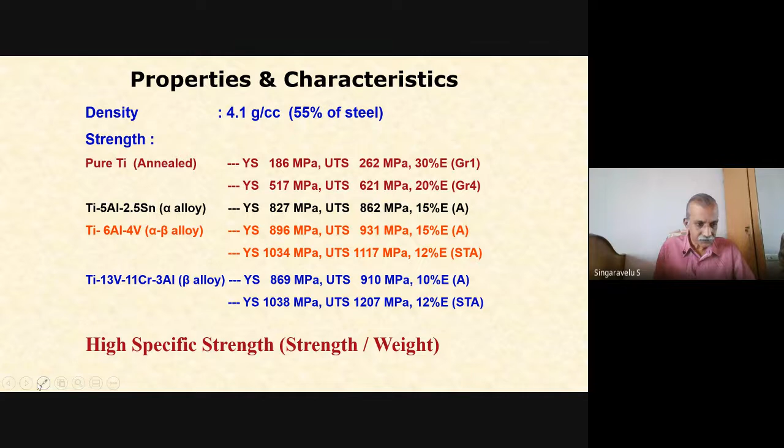So this I have already seen. Okay, corrosion resistance, especially in sea water, is good. Acid solution will have high oxidation resistance. It's having a good resistance to corrosion.

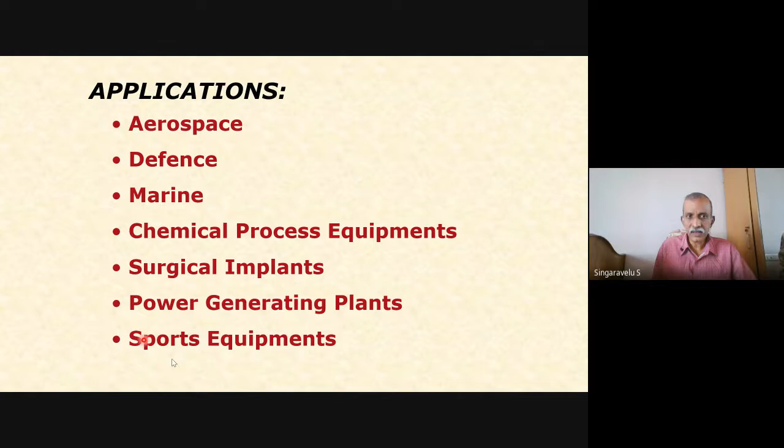Applications - critical applications like aerospace, defense, marine, chemical processing equipment, surgical implants, power generating plants, sports equipment. Light weight, corrosion resistance, good fatigue, high strength - all these call for critical applications in these areas. In aerospace, highly loaded components, airframe components, satellites - these are some areas, especially the fuel tank, engine casing.

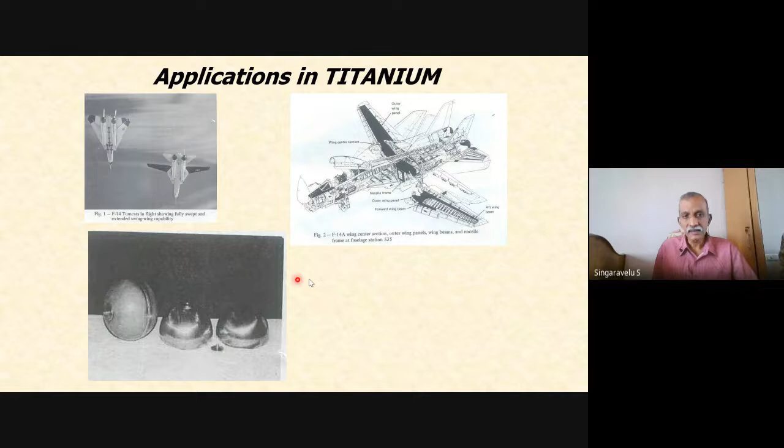These are made of titanium alloys. Chemical processing equipment, because of the high corrosion resistance - storage tank, anode basket in the electrolytic process. In all these areas titanium has been widely used. This is some of the applications where titanium has been used in aircraft industries and marine applications.

Coming to the alloy system - I told you it's commercially pure alloy, pure titanium, we call one category. Next is the alpha alloy, titanium alpha alloy. Another one is called beta alloy. So we have alpha, beta, and alpha-beta alloys in between.

In the alpha-beta form, or in the process, we are able to quench it and get the required high hardness - 1038, 1034, that range - by using this to retain the strength.

So which elements stabilize which phases? Aluminum stabilizes the alpha phase. Beta stabilizers include chromium, columbium, copper, iron, molybdenum, nickel, palladium, silicon, tantalum, tungsten, vanadium - all these stabilize the beta phase. If you add these, the beta phase gets widened.

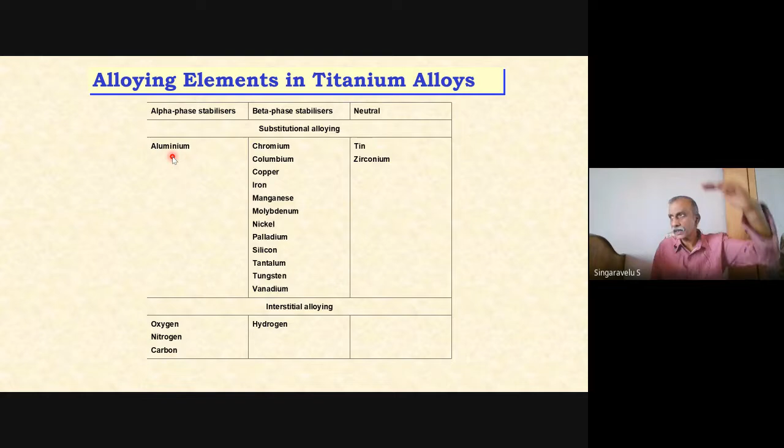Aluminum increases the alpha phase area, along with neutral tin and zirconium. There are certain interstitial elements: hydrogen, oxygen, nitrogen, carbon. These, within the space lattice at the atomic level, will go and sit between two titanium atoms.

So coming to the specification, ASTM has many grades. Aluminum, zirconium, moly - all these become the nominal composition of alloying elements. Look at these impurity levels - iron becomes an impurity here, oxygen is an impurity, carbon itself is an impurity here, at 0.1. Look at these strength levels.

It goes from 262 ultimate tensile strength, to 862, 924, 986. These are unalloyed, the top one. When we have alpha, near-alpha alloys, the strength goes up to 986, and yield becomes 938.

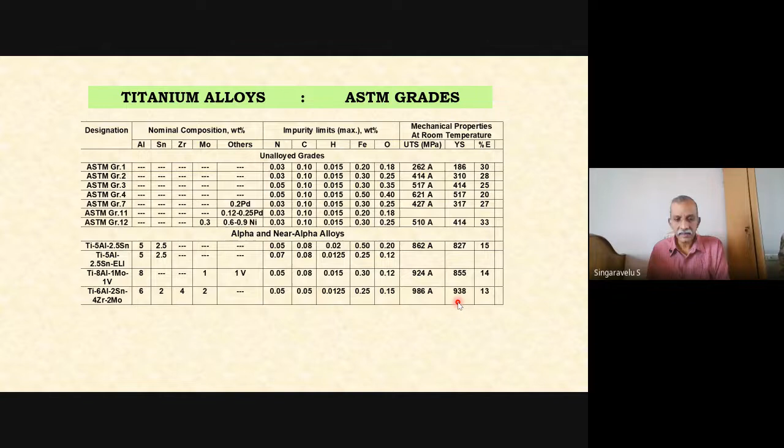So we have alpha-beta alloys, strength around 1117. Beta alloys are 1200, 1241, 1524. We have titanium with tin 4.5, zirconium 6, moly 11.5. This goes to the 1524 solution treated and aged condition. These are all the advantages.

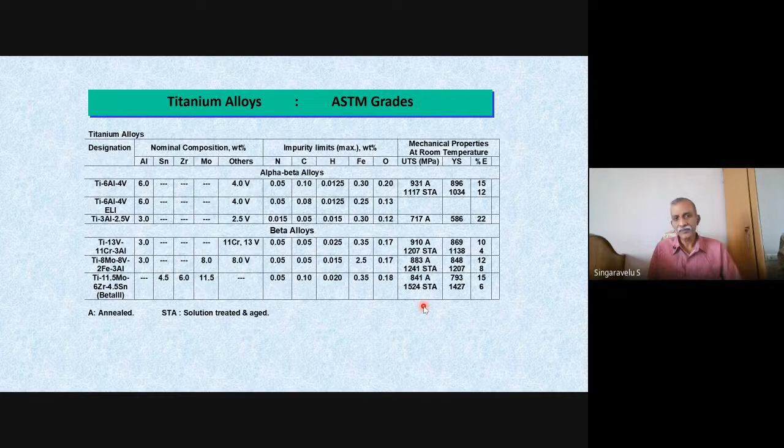Because of this solution treatment, we are able to get the required strength, taking it back to high temperatures where the allotropic form exists. Now if there's no allotropic form, it's the same alpha structure, so there's no use.

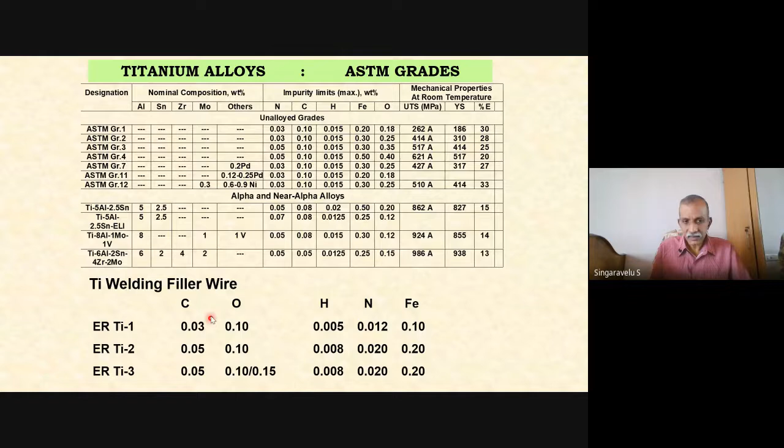Coming to the wire: ER Ti-1 TIG wire, filler wire, ER Ti-2, ER Ti-3. You have carbon 0.03, oxygen which must be well controlled, and these requirements are very important because this becomes an impurity level you have to control. The rest of the things match with respect to the alloy content.

These are various heat treatments, just for information. As I said, solution treated and aged: you take it to 900 to 970 for alpha beta alloys and quench it in water, hold for 1 hour then quench. Then the strength becomes high. If you do the aging after that, the specifications come out, with temperature at 480 to 510 for 12 hours - that is the aging treatment.

Similarly for beta alloys, the solutionizing treatment temperature is 760 to 850, and so on. Only for stress relieving, look at these temperatures: it's only 480 for pure titanium, in alpha beta alloys it's only 590, and alpha goes to 640 max. Within this range only, we have to heat it and do the stress relieving operation.

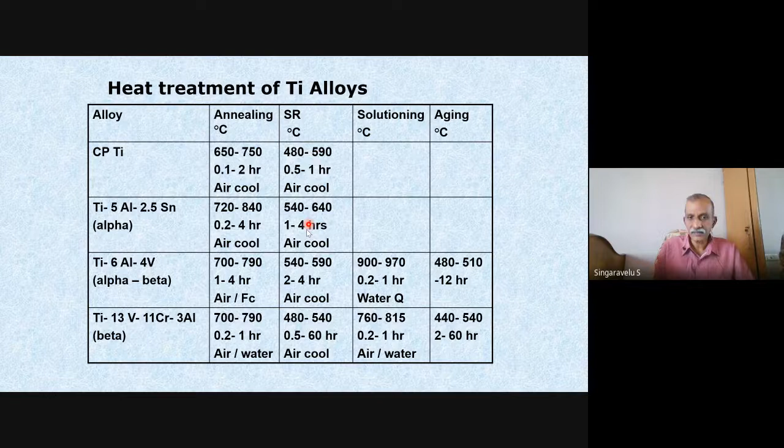Coming to the welding part: TIG welding, plasma arc welding, electron beam welding - all these processes are suitable with respect to the fusion welding route. Coming to solid state welding processes: diffusion bonding, superplastic forming followed by diffusion bonding, then friction welding, explosive bonding. These are all the techniques by which we can do the welding of titanium and its alloys.

On the basic requirement in fusion welding process, TIG is the best suited process, or electron beam welding by vacuum. Inert gas shielding is very much required - additional shielding for the solidified metal up to even 430, cooling to 350. Beyond 430 this metal starts reacting with oxidation. That's why once the weld is completed, the weld bead should be allowed to cool down to 350 with inert gas shielding. That is called secondary shielding, as people used to call it.

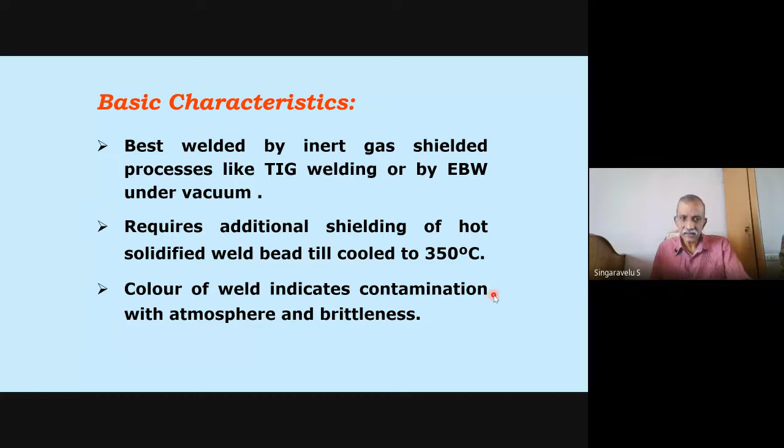The color of the weld indicates the contamination. Where it has reacted with oxidation and all can be very well seen with the naked eye with the color. This results in brittleness.

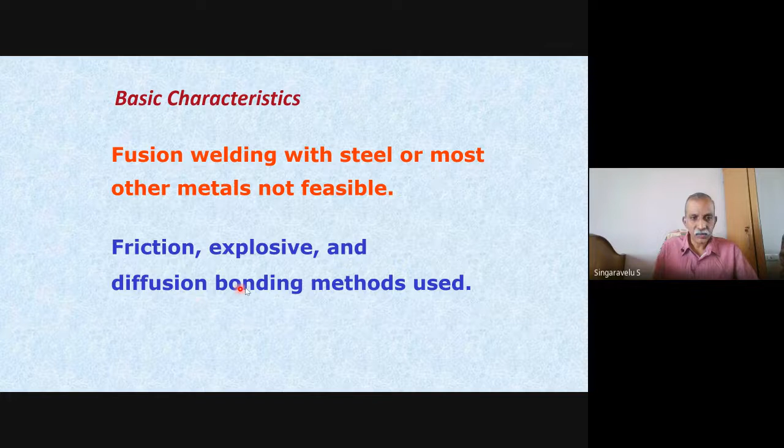Fusion welding with steel or other materials is not possible - that is one of the drawbacks. Friction welding, explosive bonding and diffusion bonding methods that we have discussed, we will see in detail.

That's the major advantage of using these materials for welding applications. So we'll discuss how we can do the TIG welding.

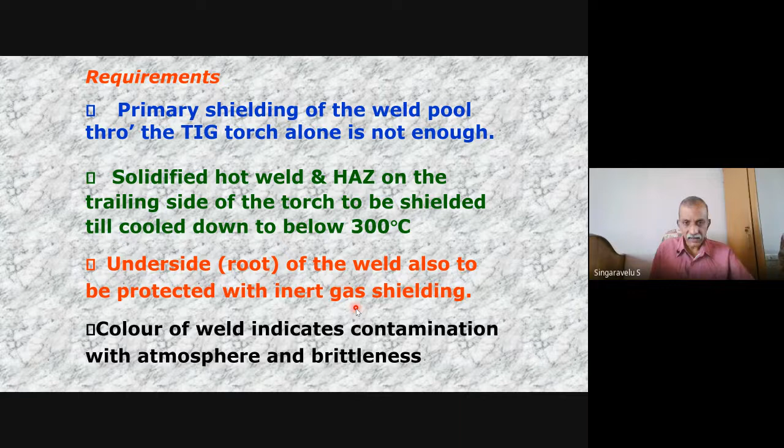Primary shielding - there are two shieldings: one is primary shielding, another is secondary shielding. Primary shielding through the TIG torch alone is not enough; you have to go for additional shielding, called secondary shielding. The solidified hot metal - the weld and the HAZ, not only the weld - has to be shielded by the trailing side of the torch. The weld which has already been completed has to be protected from the atmosphere till it cools down to 300 degrees centigrade. So we need the shielding, called secondary shielding. The root side also has to be shielded by inert gas. These types of shielding are mandatory in TIG welding.

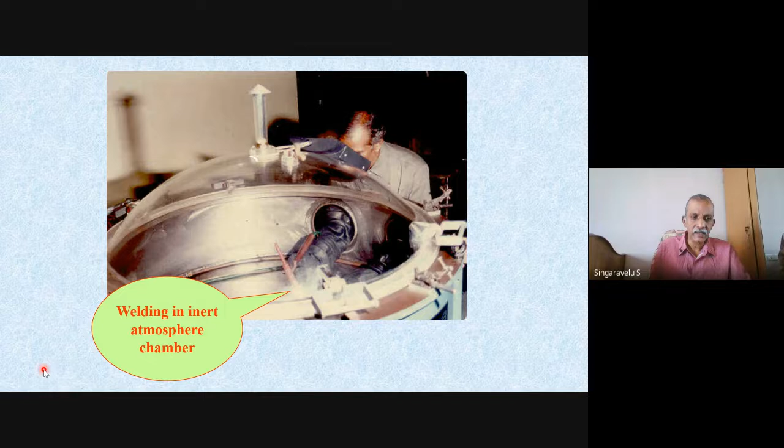So how can these be achieved? All this shielding can be achieved by doing the welding in an inert atmosphere chamber, a flow-purged chamber or a vacuum-purged chamber, or by welding in open air with auxiliary additional shielding. This is the inert atmosphere chamber, called glove box welding, where the air in the entire chamber has been removed and inert atmosphere like argon has been pumped in - like a glove for COVID testing - the welder has to put his hands inside, take the torch inside, and do the welding there. By this way, the root, additional shielding, and trailing shielding are all taken care of. This is another setup like that.

So wherein with the flow, these are all the inlet and outlet mechanisms by which the argon gas is supplied in. This is the component by which they are doing the TIG welding. This is the torch you can see. The welder has to manipulate the welding after seeing it, right?

So this entire chamber is filled with argon. Purging has been taken care of both for the trailing and the root arch, right? This is another chamber, completely vacuumized, a vacuum purged chamber. The component has been kept inside after the vacuum is built, and the welding has been done.

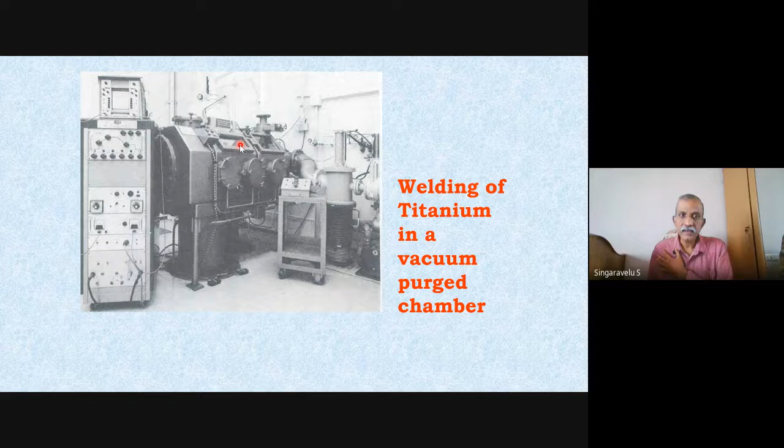Coming to shielding, in case of open air, primary shielding is through the torch, which has been taken care of. The secondary shielding is the trailing shield. As you know, already deposited weld metal has to be protected from the atmosphere, and that is taken care of by the trailing shield. This takes care of the solidified metal and the HAZ. Backside shielding is for the root pass protection, and that is for the grooved backing bar for root bead shielding.

The electrode is thoriated tungsten in the case of TIG welding. Normally the size will be bigger for the same current rating compared to ferrous material. Flow rate should always be higher, right? Use a gas lens for laminar flow. The flow should be laminar, not turbulent, so that the shielding becomes 100% effective.

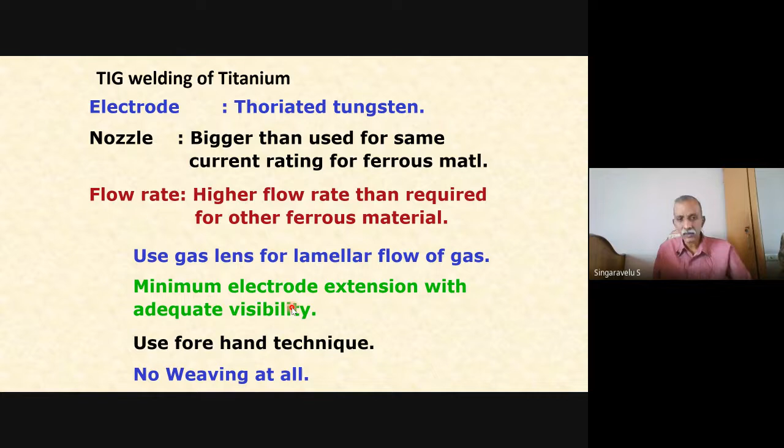Minimum electrode extension - normally the electrode tip will be protruding outside in TIG welding, so its length should be kept to the barest minimum, otherwise there is a chance of touching the titanium and getting contaminated. So minimum extension is required. Use the forehand technique, no weaving at all, right? This is open air welding with manual TIG.

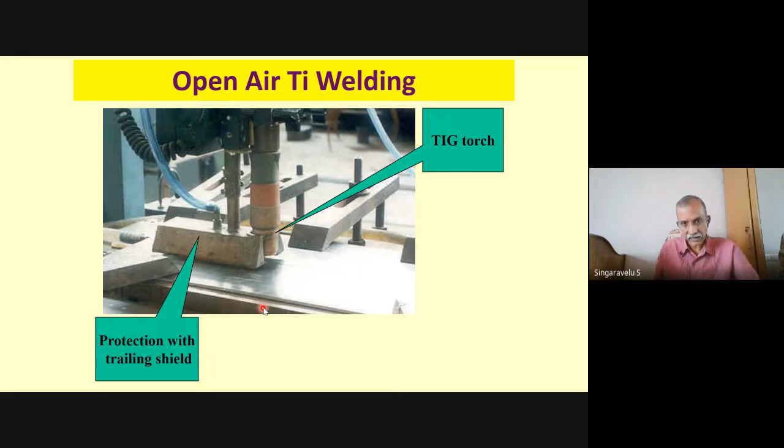This is the one - since it's a bead on plate welding, underneath there is no purging required. This is the shield. This is another one; it takes care of the pipe welding. This is the trailing shield, which takes care of the deposited weld metal and the HAZ. This is another way - this is the shielding arrangement setup.

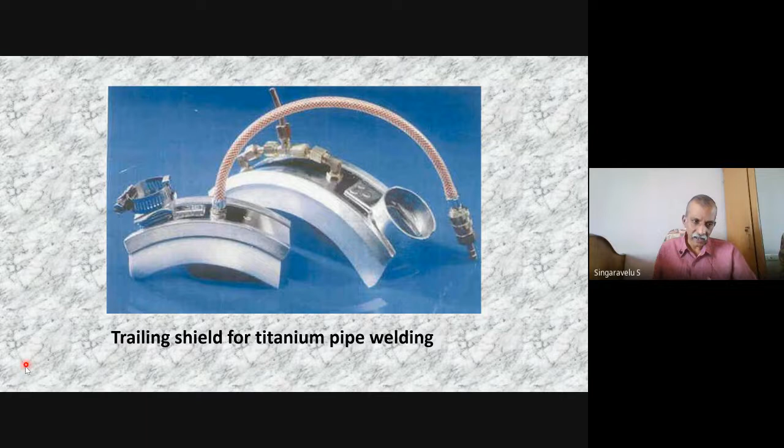Here it's made separately shown. Here we have an inlet which takes care of the curve, takes care of the common component geometry. Likewise you have to make the shield. The shield need not be like this alone - we have to take care of it based on the application and the geometry.

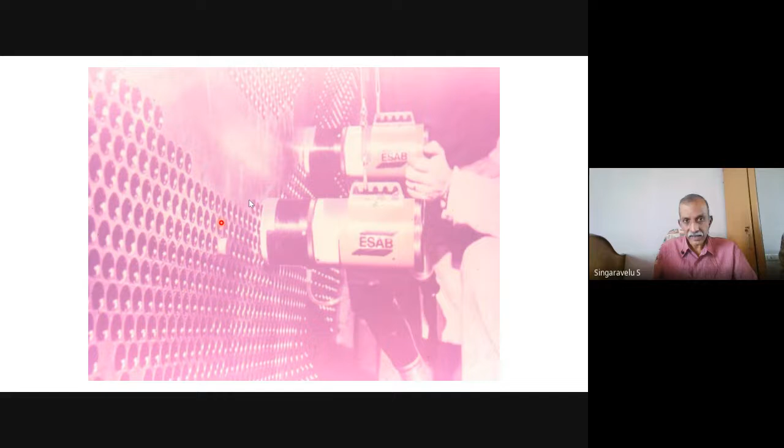This is the typical tube to tube sheet welding, right? Made up of titanium. Tubes are inserted here. They have been extensively used for nuclear steam generators.

So how to detect this contamination? I said there are some colors by which you can identify how this contamination happens - ineffective shielding, that is primary shielding, trailing shielding, contaminated shielding gas itself, the base metal and filler metal, right? These things have to be effectively avoided.

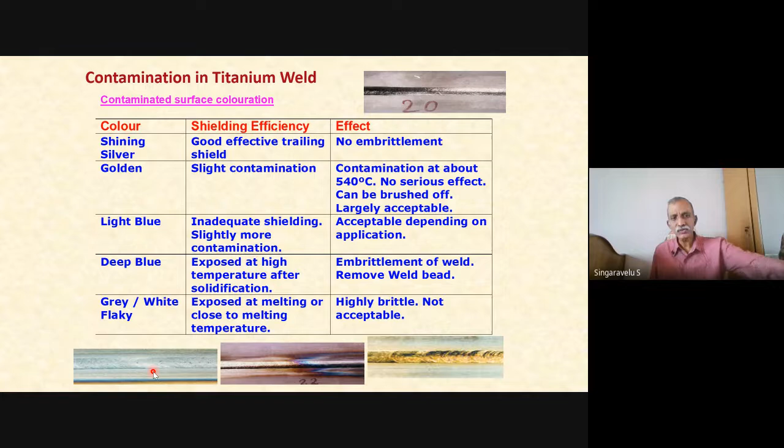Depending upon the application, we can decide with that. Deep blue - embrittlement of the weld, you have to remove it totally. Gray, white - highly brittle, you should not use these.

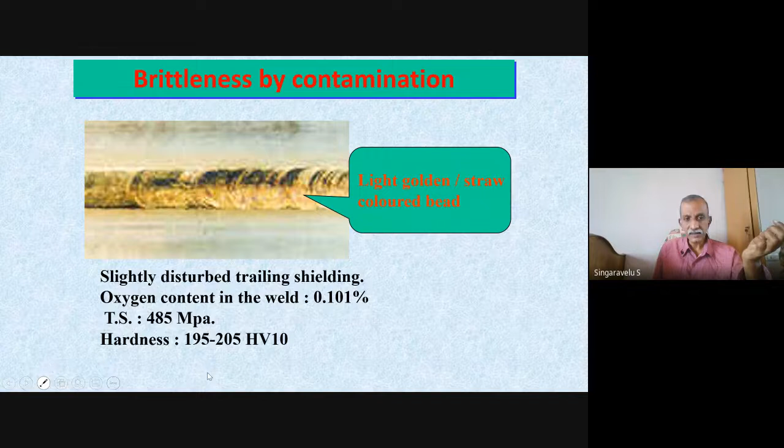So this is another one - white. Trailing shield is not sufficient. It has failed in the bend test because of this brittleness.

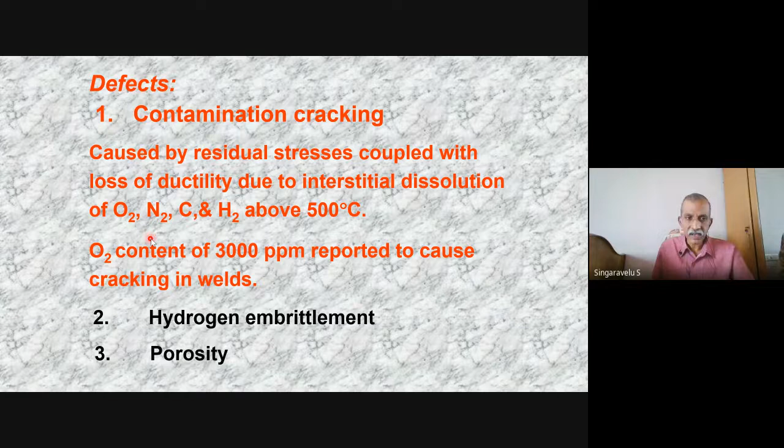Coming to the defect part, contamination cracking is caused by residual stress coupled with a lack of ductility. The interstitial elements, some of which go into solution in between the titanium atoms - like oxygen, nitrogen, carbon, hydrogen. Oxygen plays a very important role; its content, almost about 3000 ppm, causes cracking in the weld. Hydrogen embrittlement and resultant porosity also occur.

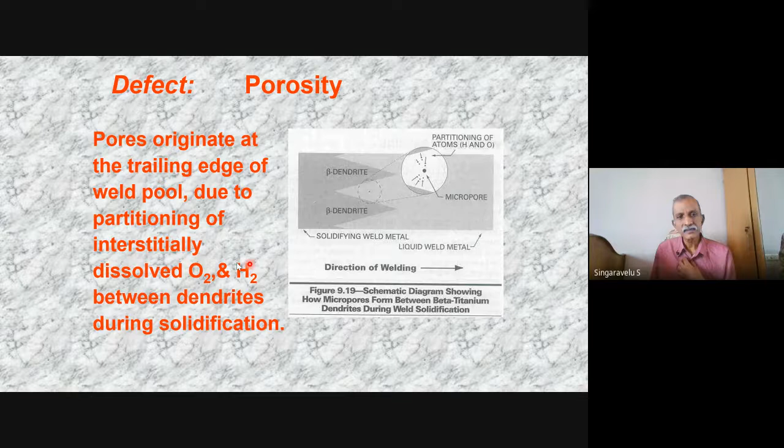What's the remedy then? Cleanliness, cleanliness, cleanliness is the only solution. The joint surface has to be cleaned with a stainless steel wire brush. Don't use this wire brush for other applications. An exclusively separate wire brush has to be kept, made of stainless steel. It is very much important.

Aluminum oxide or silicon carbide grinding wheel should be used. Degrease with acetone, including the filler rod and the areas, to remove all hydrocarbons. Adequate inert gas shielding is needed till up to 300 degrees centigrade of the deposited weld metal. Most important thing, shielding gas should be restricted with oxygen and moisture content.

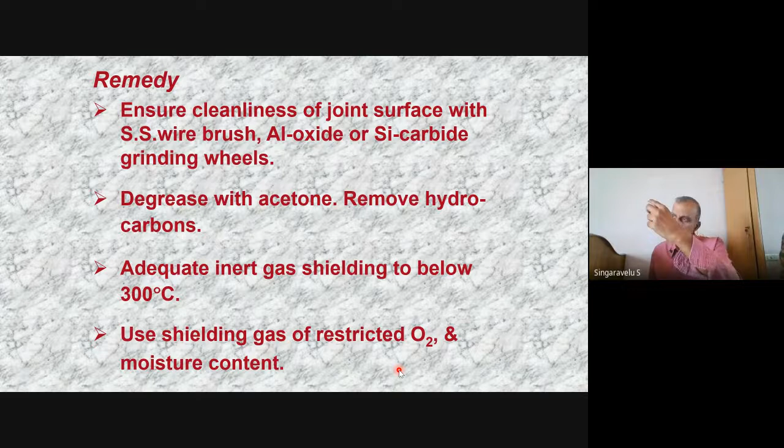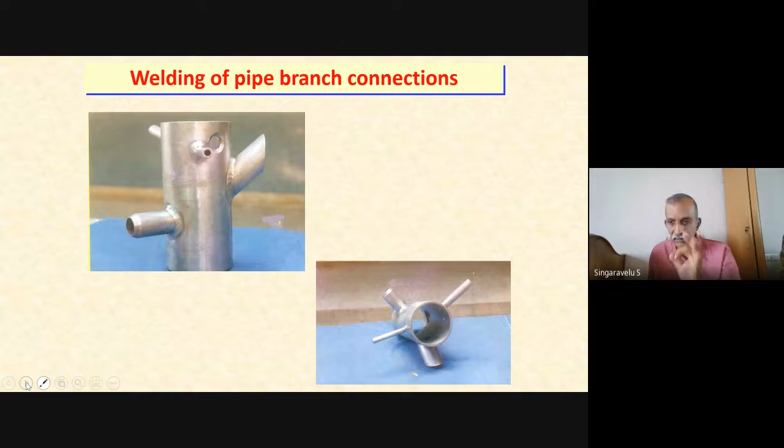That is very much important. You should not touch the wire with bare hands. It is important. This is some of the component - I think you can skip that.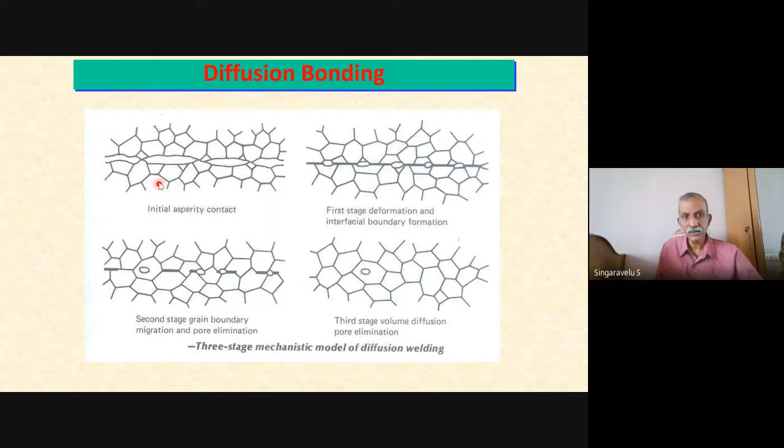This is the mechanism. Initially we have some contact like that. The first stage is deformation and interfacial boundary formation. In the second stage, there will be migration and the entire pores are getting eliminated. In the final stage, the entire volume of pores is eliminated, and you have proper bonding between the two.

Skip that structure. Temperature is almost 0.6 to 0.8 times the melting point - this is what has to be done. For alpha beta titanium alloys, it is 75 to 100 degrees Fahrenheit above beta transus. Transus is nothing but the critical temperature - like in the iron carbon diagram you have seen lower critical temperature, upper critical temperature, and so on.

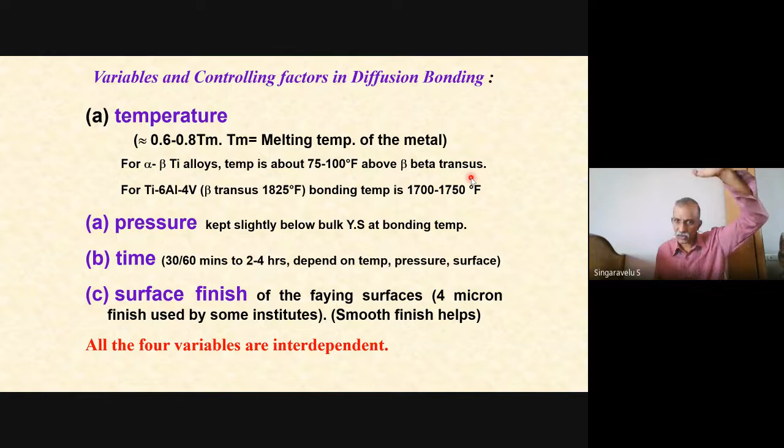Here there is only one transition, alpha to beta. The temperature is called the beta transus, and it is always 75 degrees Fahrenheit above the beta transus temperature. For titanium aluminum, it is 1825 degrees Fahrenheit. Pressure should be just below the yield point, and time is also a parameter.

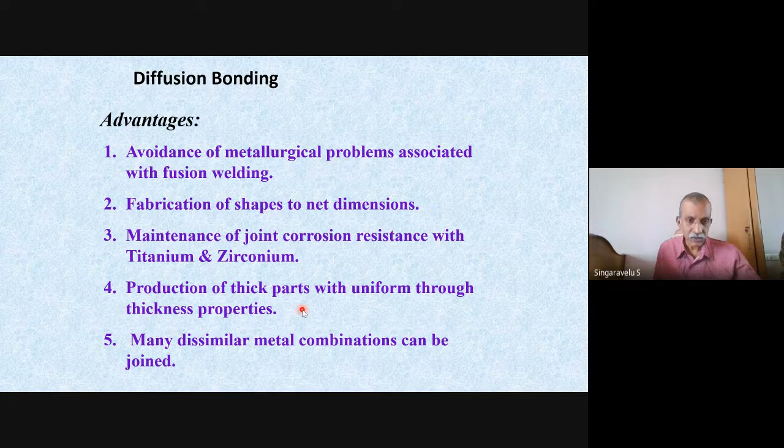These parameters have to be followed for this particular process. The advantage is avoidance of metallurgical problems, fabrication of different shapes to net dimensions - what dimensions you can maintain. Corrosion resistance is very well maintained, since titanium applications call for corrosion resistance. Production of thick parts with uniform through-thickness properties is a major advantage, and dissimilar combinations can be done with this welding.

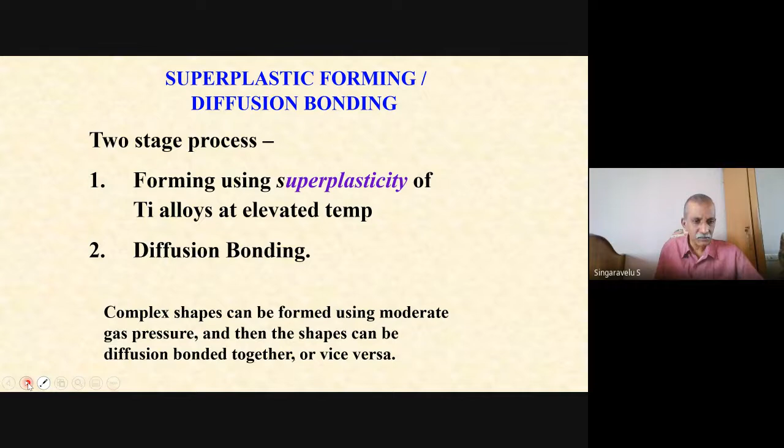This is one of the latest techniques called superplastic forming coupled with diffusion bonding in titanium. It's a two-stage process. Forming usually uses superplasticity of the titanium alloys at elevated temperature, then diffusion bonding takes place. Complex shapes can be obtained by this process.

The definition: superplasticity is a phenomenon by which materials are able to achieve extraordinary elongation without undergoing necking, that is without breaking. Titanium can be elongated to 1000% at temperatures of 926 to 954 degrees centigrade. That is the advantage, that's why we go for superplastic forming.

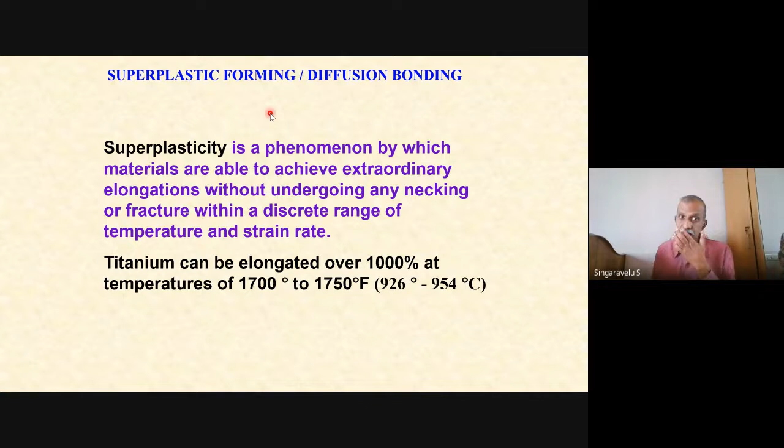After superplastic forming coupled with diffusion bonding, this is the single sheet which has been formed. These shapes have been taken care of with a single sheet. Let us see how it has been done. So we have a single sheet, two sheets, three sheets - titanium aluminum vanadium sheet.

Put these together, the reinforced structure in the single sheet has been formed by superplastic forming. With two sheets, this is the die, you have the top pieces and another one - this is how it has been formed. The top has been joined like this. In this area, this has been formed and the welding has been done.

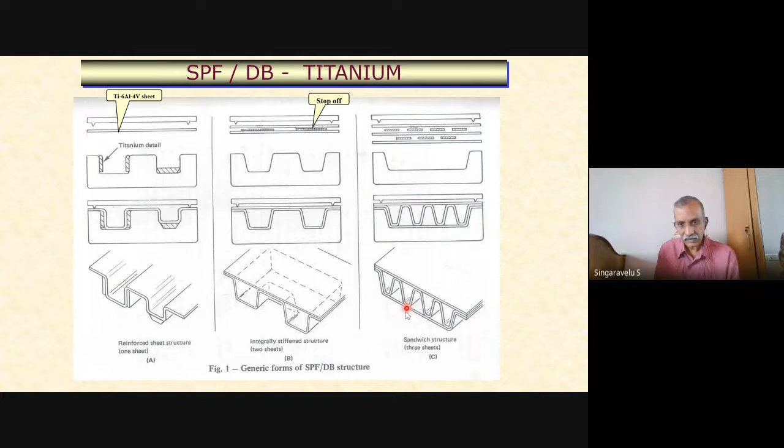This is the sandwich structure with three sheets. Bottom like a pan shape, in between you have like this, on the top you have - so all these three, plate 1, plate 2, plate 3, and in between, superplastic forming coupled with welding is done here, here, here, here by diffusion bonding. This is the major advantage by which titanium components are being manufactured.

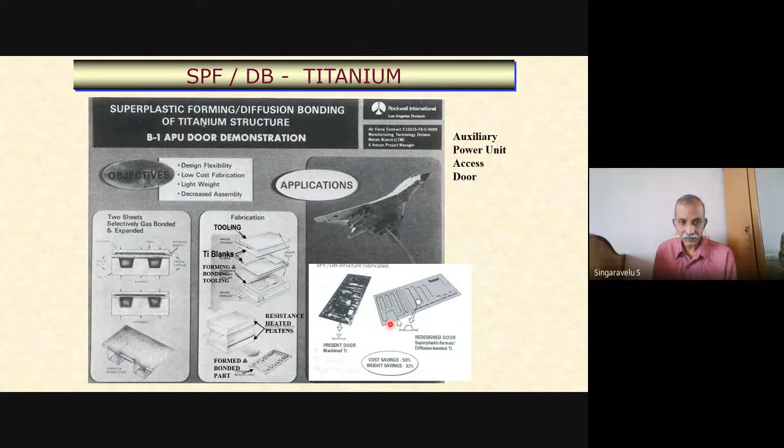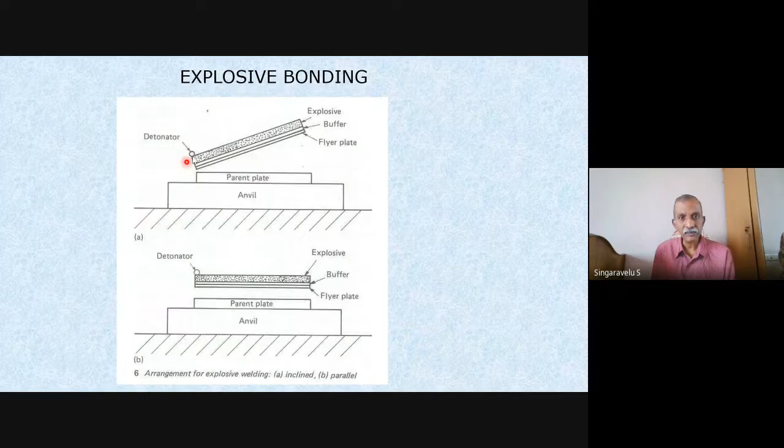Another one is explosive welding. We have studied that - we have the anvil, the parent material, and another flyer plate, and above that we have the explosive and a detonator. Once the detonator gives fire, the explosives give the required energy, and the parent plate and the flyer plate get welded together.

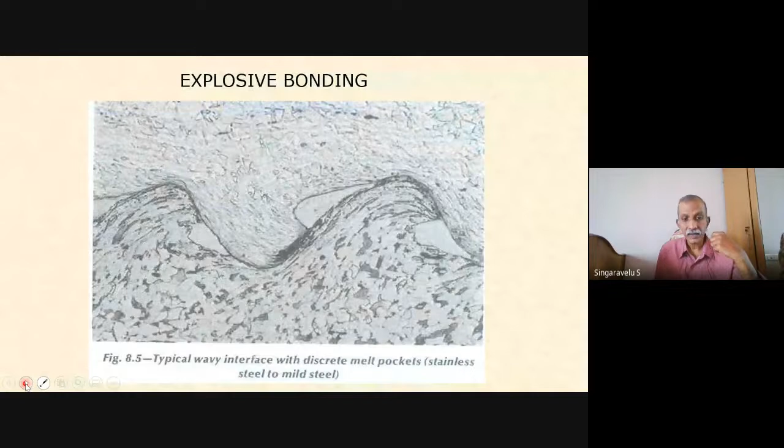This is how the structure will be at the interface - this is called explosive bonding. Titanium can be joined with explosive welding by this method. So this is a titanium clad sheet done by the explosive cladding method. It is steel - this is the titanium clad plate, showing how it has been joined.

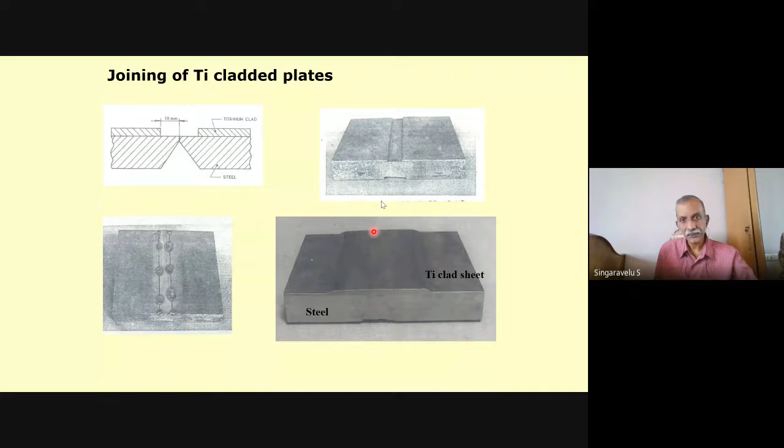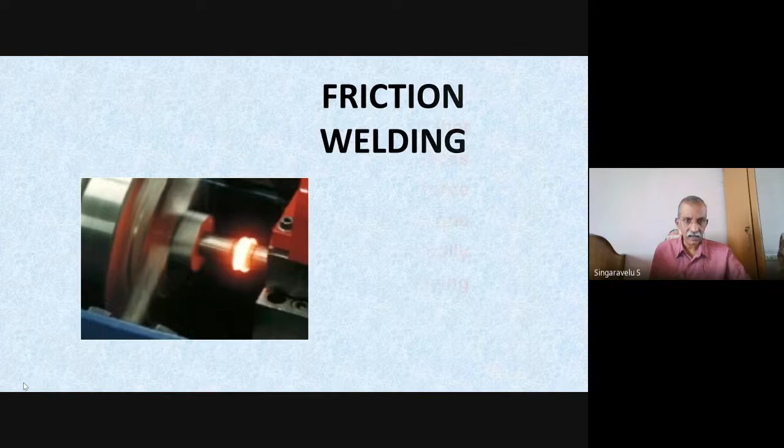Explosive welding is another method, it's very good for titanium welding. Coming to the friction welding part, all of you would have seen what friction welding is. It's a solid state process, please understand.

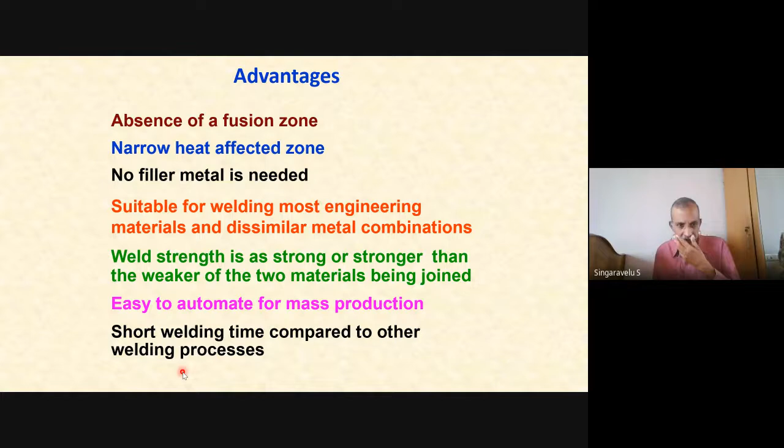In the beginning, the two members are there. We rotate it and the flash starts forming, and once the flash develops, we apply force and forging takes place. It is near the melting temperature in the solid state, and we are able to join both components. Fusion zone is absent, the HAZ is very narrow, no need for filler - these are some advantages. Most importantly, it is easy to automate for mass production.

Titanium can be welded with friction. This is some of these components - stainless steel to titanium has been done with friction welding. This is titanium to titanium, it has been welded by friction welding. This is another advantage by which we can form titanium components.

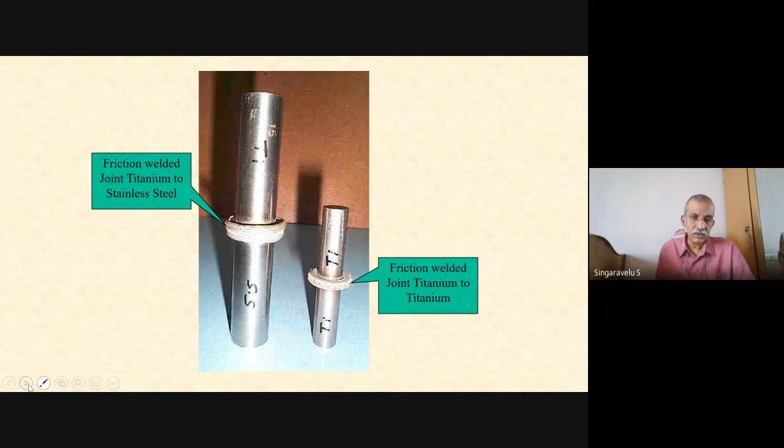In a nutshell, titanium is allotropic. Shielding becomes very important - primary, secondary, and root shielding. Strength is very high, with good corrosion resistance. The process is TIG, and it can also be done with other processes like solid state friction welding, explosive welding, and superplastic diffusion bonding. Colors indicate whether the weld has been contaminated and so on.

Coming to the copper welding part.

It's a highly ductile material. Melting point is very low, but the fun part is thermal and electrical conductivity is very high, excellent electrical conductivity. Similar to titanium, the corrosion resistance in certain environments, especially seawater corrosion, is good.

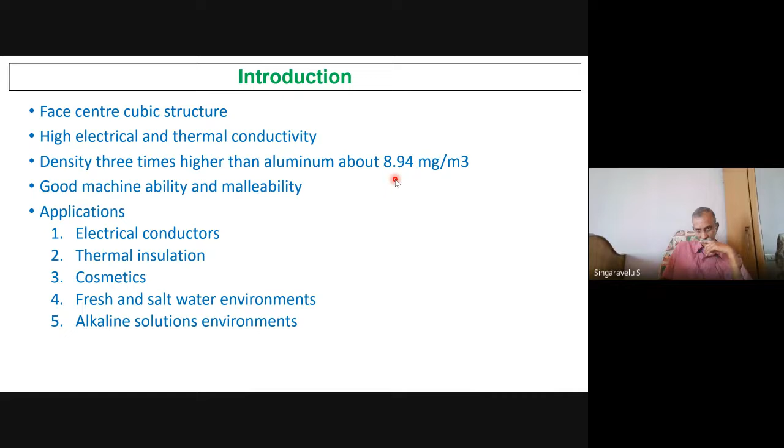You can easily fabricate it, good strength and fatigue resistance. It is a face centered cubic structure at room temperature. Density is 3 times higher than aluminium, about 8.9. Malleability is good, machinability is good.

Applications: electrical conductors, thermal insulation, cosmetics, saltwater environment, alkaline solution environment, because it has good corrosion resistance and good electrical conductivity. Those areas this has been widely used.

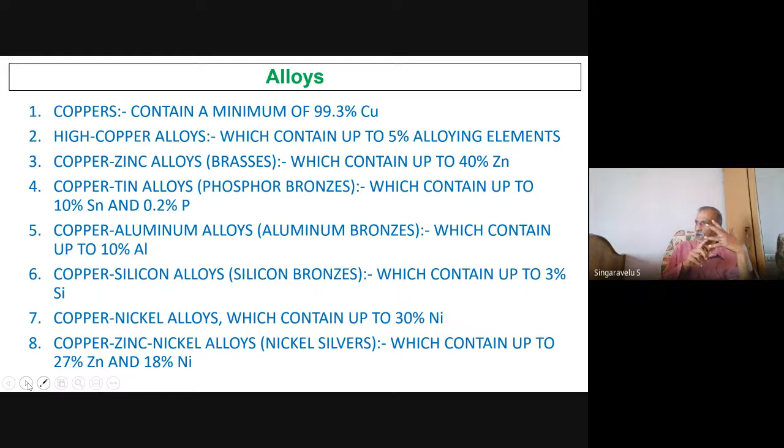Coming to the alloy system, titanium we have only three: pure titanium, or alpha, beta, like that, and rather the strength has been increased due to solution treating. Here, these alloy systems have been devised in such a way that we have pure copper, almost 99.3% copper. Another one is high copper, where we can add up to 5% of alloying element.

Another one is called the very famous alloy, copper zinc alloy. We call it brass. You've heard about it. Brass is copper zinc alloy. 40% zinc is added, called copper zinc.

Another one is called copper tin alloy. This is called phosphorus bronze, because tin becomes the primary element. It contains up to 10% tin and up to 0.2% phosphorus. It's called phosphor bronze. We have pure copper, we have brass, and we have phosphor bronze.

And we have copper aluminium, called aluminium bronze, with 10% aluminium. Third one is called silicon bronze, which contains 3% silicon.

And we have copper nickel alloys, kind of up to 30% nickel. And we have copper zinc nickel alloys, which we call nickel silver. It contains 27% zinc and 18% nickel.

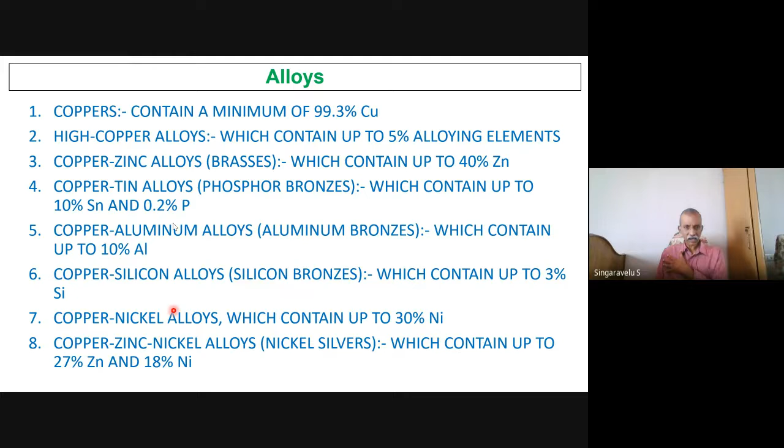You need not memorize all those things, but you can identify copper as pure copper. We have alloyed copper. We have bronze, phosphorus bronze, aluminium bronze, silicon bronze. And we have copper nickel and nickel silver. These are some of the alloy systems by which copper has been identified.

The questions have been asked: name of the alloys, the type of brasses, or the aluminum alloys, you can identify. And the alloys in the cast structure.

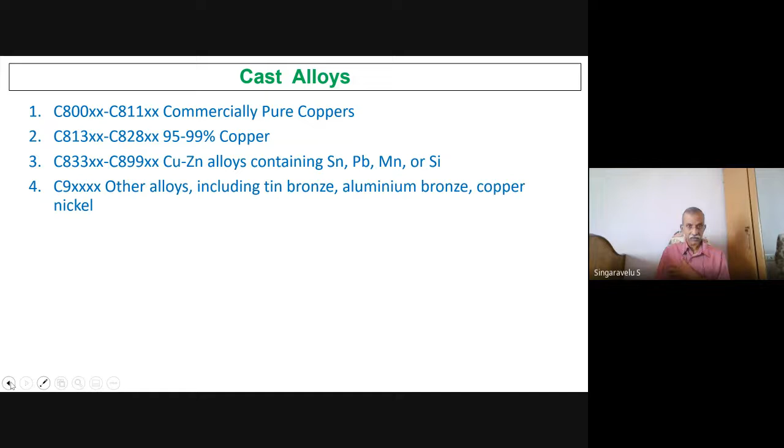This 8000 series is called pure copper. 813 to 828 series is called 95 to 99% copper. 833 to 899 is copper zinc alloys. And 9000 series is called other alloys, in the cast form. This is in the rod form, tube, sheet, and so on.

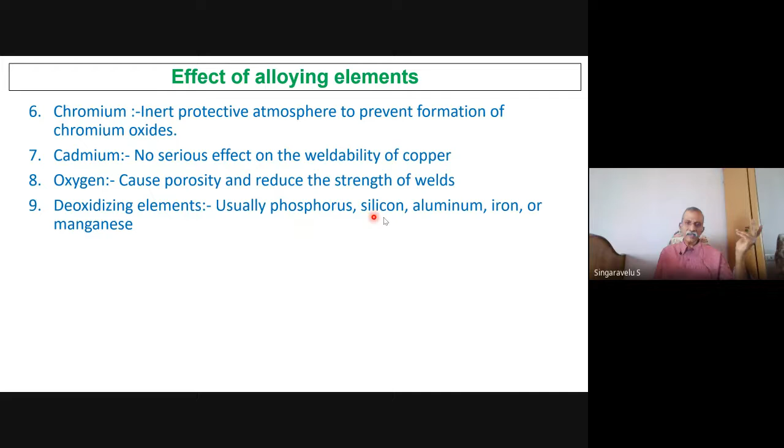Chromium needs an inert protective atmosphere to prevent formation of chromium oxide. Cadmium has no serious effect. Oxygen causes porosity, reduces strength. Some deoxidizing elements, usually phosphorus, silicon, aluminum, iron, have been added. This is something with respect to the alloying elements' effect.

Coming to the weldability part, what are these factors which get affected? Effects of thermal conductivity: copper has a high thermal conductivity. The type of current and shielding gas must be selected to provide maximum heat input because heat is immediately dissipated. Preheating is decided based upon the base material thickness.

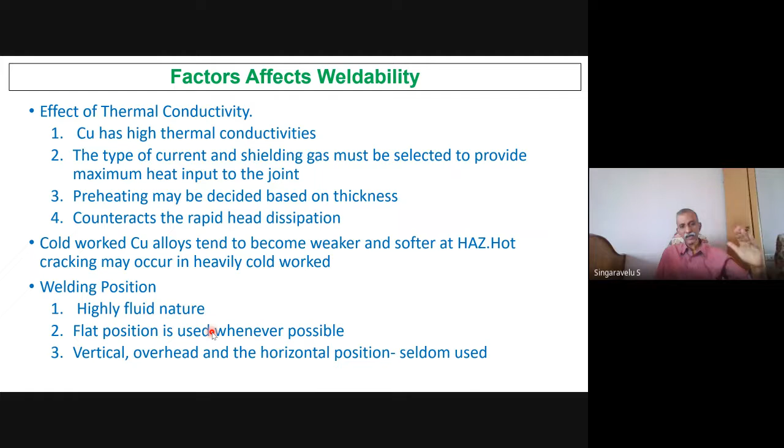This thermal conductivity counteracts the rapid heat dissipation. Cold worked copper tends to become weaker and softer at the HAZ. Hot cracking may occur during welding. Regarding welding position, due to the highly fluid nature, flat position should be used wherever possible. Vertical and overhead positions are rarely used.

Precipitation hardened alloys have beryllium, chromium, boron, nickel, silicon added to them. That should be taken care of during oxidation.

There is a reduction in mechanical properties due to over-aging. In precipitation hardening and aging alloys, certain elements are added which come as precipitates that enhance the strength. If overaging occurs, that is, if it's kept at higher temperatures during the welding process for some more time during cooling, this may reduce the mechanical properties. It should be welded in the annealed condition, followed by the precipitation treatment. This is the solution.

Alloys will deteriorate their own mechanical properties because of this aging. After aging, these precipitates will never come back to their original state, so it will not form the precipitates again. The precipitate gets broken down, which is called overaging. So the better process is to do it in the annealed condition, followed by the precipitation treatment.

Hot cracking is another problem associated with copper, copper-tin alloy, and copper-nickel, because there is a wide difference between the solidus and liquidus temperatures. If you look at the iron-carbon diagram or similar alloy systems, the difference is very high. Severe shrinkage stresses are produced, and interdendritic liquid metal gets entrapped between thin films, which causes hot cracking. Porosity: zinc and cadmium have low boiling points, which leads to porosity. Vaporization of these elements also results in porosity.

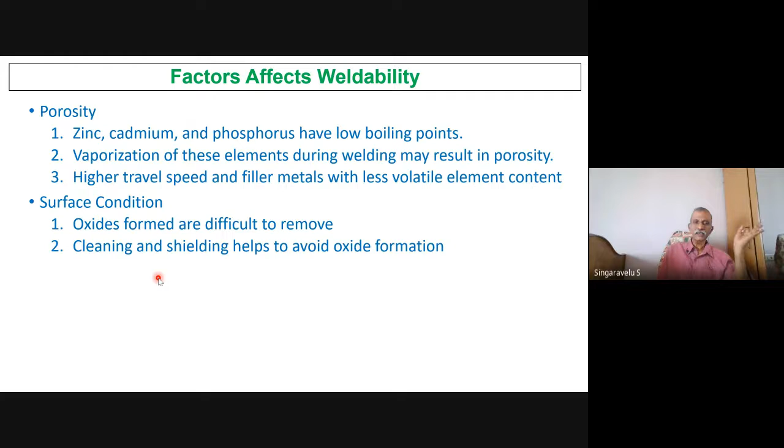Zinc vapor, high travel speed, and filler metals with less volatile element content are the required solution. As for surface conditions, oxides formed are very difficult to remove. Cleaning and shielding helps to avoid oxide formation.

Coming to the real weldability characteristics of these alloys, from pure copper to various brasses and bronzes: pure copper has high conductivity and requires preheating above 5 mm thickness. There's porosity and embrittlement in the HAZ in tough pitch copper, and porosity in the heat affected zone in phosphorus deoxidized copper. You have to preheat beyond 5 mm.

In the brasses, zinc vaporization occurs. Brass is an alloy of copper and zinc, and zinc vaporization gives porosity and toxic fumes. Low zinc brass, up to 20%, is weldable by fusion, and caution requires selecting zinc-free filler metal. Normally, brazing is preferred for these brasses. Higher zinc content is very difficult to weld by fusion, so brazing is the best method.

Tin and phosphorus bronzes: very high hot cracking occurs, prone to hot cracking because these form low melting bonds. Aluminium bronze forms aluminium oxide. To prevent that, go for gas shielded processes like TIG with AC, or MIG. It has low thermal conductivity, so no need to preheat for aluminum bronze.

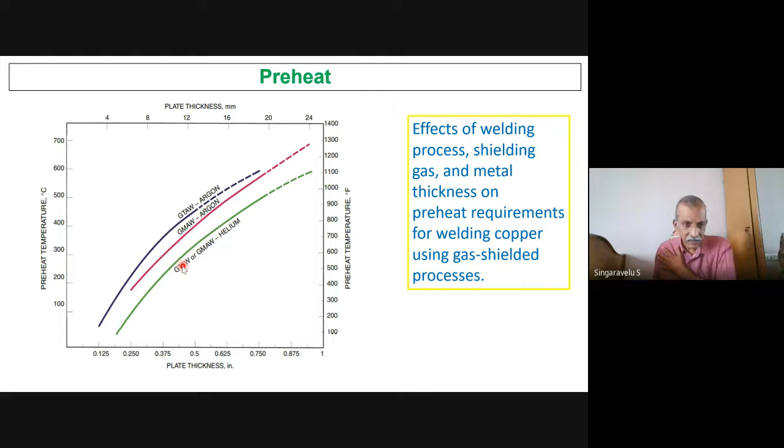I'm not going to go in detail with that. There will be a reduction in preheating temperature. This is unique for this copper welding.

Coming to the effect of shielding gas with respect to preheat on the bead or penetration effect, with helium you can see penetration of almost 6 mm, nearly 5 mm. In the case of argon, if you preheat to 400 degrees, then only we can achieve the same 4.6 mm penetration. That's why the effect is more with helium, or with argon you have to go with almost 400 degrees to achieve the same penetration. If you reduce the preheat temperature with argon, the penetration comes down, because it immediately dissipates the heat.

Coming to the process side, SMAW is normally used for maintenance surfacing of worn-out parts. Electrodes available are ECuSi, ECuSn-A and so on. Use DCEP, as I said earlier, for flat position welding.

In the case of TIG, argon or argon-helium mixtures are used with increased heat input, AC used for aluminum bronze and copper beryllium alloys up to 3.2 mm. Pulsed current can also be used in TIG welding.

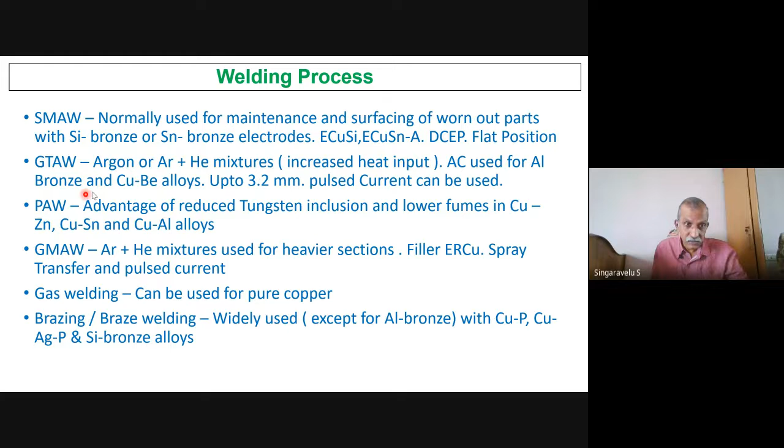Plasma arc welding can be done, with the advantage of reduced tungsten inclusion and lower fumes. Why? The tungsten rod is kept inside the cup, the nozzle, it is not protruding outside. In TIG it protrudes outside, but in plasma arc welding it is kept well inside, recessed. No inclusion, very good process.

GMAW can be done, argon plus helium mixes for heavier sections. Filler is ERCU, spray transfer, pulse current can be used. Gas welding is used for pure copper, no problem.

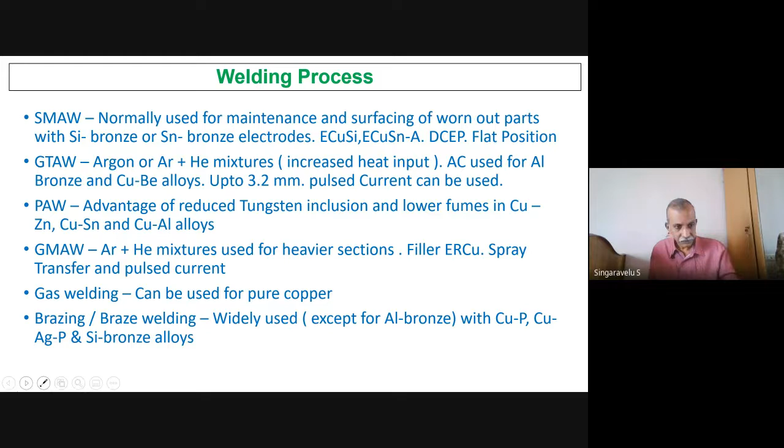Leaded bronzes are unweldable. Use helium shielding for alloys with higher thermal conductivity. Filler should not have zinc; the recommended filler is ERCU-SN-A. Do the same for brass, you can do it with GMAW, filler should not contain zinc. Silicon bronze uses ERCU-SIA filler, which has good fluidity because of the addition of silicon.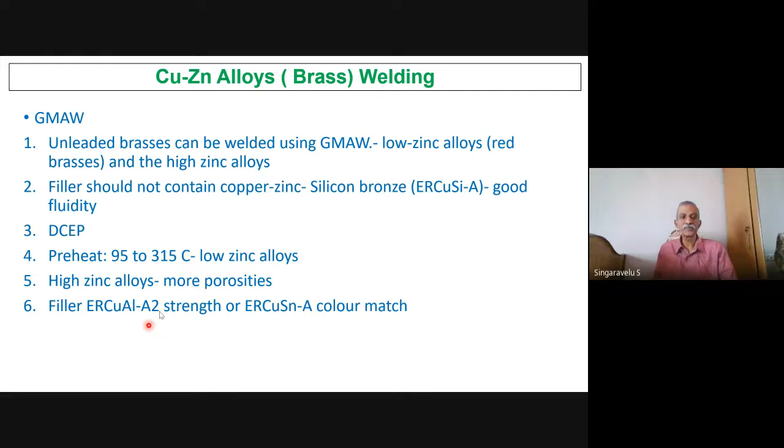Polarity is DCEP, but for GMAW you have to preheat to 95 to 315 degrees for low zinc alloy. High zinc alloy has more porosity and is not recommended.

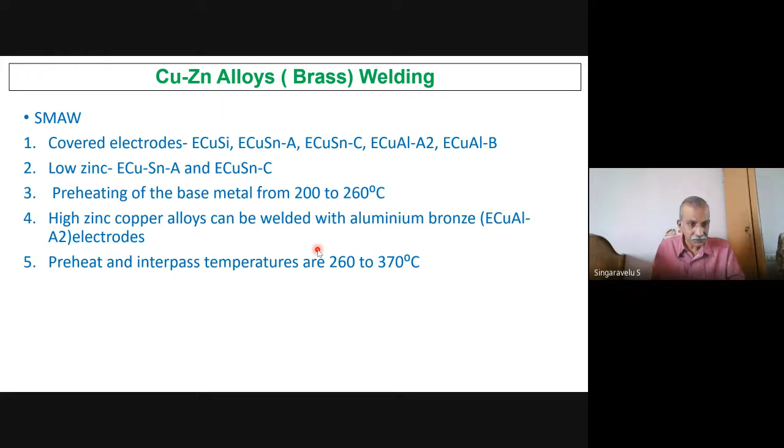SMAW electrodes are also available in different grades, low zinc is available, preheating 200 to 260 is very important. High zinc copper alloys can be welded with aluminum bronze electrodes, ECuAl-A2, for high zinc. Preheat and interpass control has to be done very carefully, 260 to 370 for zinc copper. These are some techniques to follow during SMAW.

Coming to phosphor bronze, in the case of TIG, up to 13 mm you can do DCEN or stabilized alternating current. Each layer has to be shot peened, very important. Shielding gas is argon, for thicker sections go for helium, then only you can achieve the penetration shown.

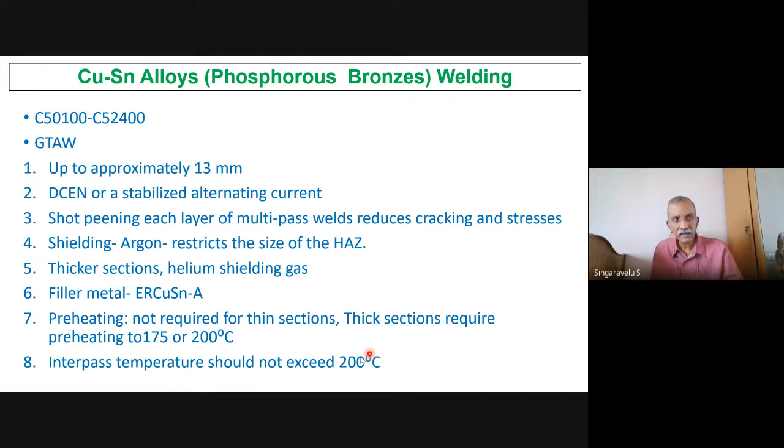Filler is ERCUSN-A. Preheating is not required for thin sections. Thick sections call for 175 to 200 degrees centigrade. Caution: 200 degrees is the limit. Do preheating, do welding, stop, do welding like that - this is the technique.

In the case of GMAW for phosphor bronze, up to 13 mm, single V filler is recommended. Preheating of phosphor bronze helps obtain complete fusion with less porosity, but columnar grains increase and it leads to hot cracking.

Precautions must be taken - preheating and interpass temperature have to be critically controlled. 190 degrees centigrade is very critical, 170 is the preheat and 190 is the upper limit. SMAW covered electrodes are available, preheating is 150 to 200. For obtaining maximum ductility, this can be post-weld heat treated to 480 degrees centigrade.

GTAW copper nickel alloys up to 1.6mm can be welded using thoriated electrode with argon shielding gas. DCEN or alternating current can be used for automatic welding. Preheating is not required.

Backing strips or rings can be used to support the root pass. Filler metal should be deoxidized to eliminate porosity and the possibility of oxygen embrittlement. The wire has to be ERCuNi, completely deoxidized, sometimes referred to as double deoxidation. An autogenous weld can be made up to 1.6mm thickness.

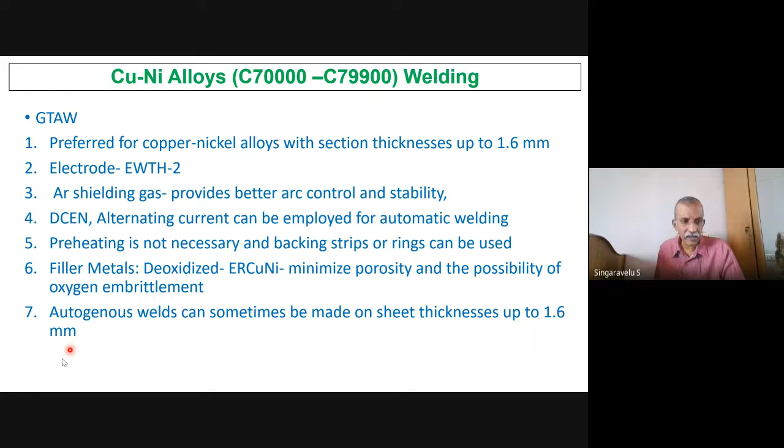For the same copper nickel alloy, GMAW is a very good process, preferred for non-ferrous copper alloys up to 1.6mm thickness, only in flat position. The shielding gas is argon; argon-helium mixes give better penetration for thick sections. Direct electrode positive is recommended, and spray transfer filler metals are available. No preheating or post heating is needed.

Interpass temperature should be maintained below 65, which is very critical. SMAW is also available; DCEP has to be used, but slag removal is a little difficult. You must ensure the slag is completely removed before depositing the next pass. This process is recommended when going for vertical and overhead positions, for certain applications.

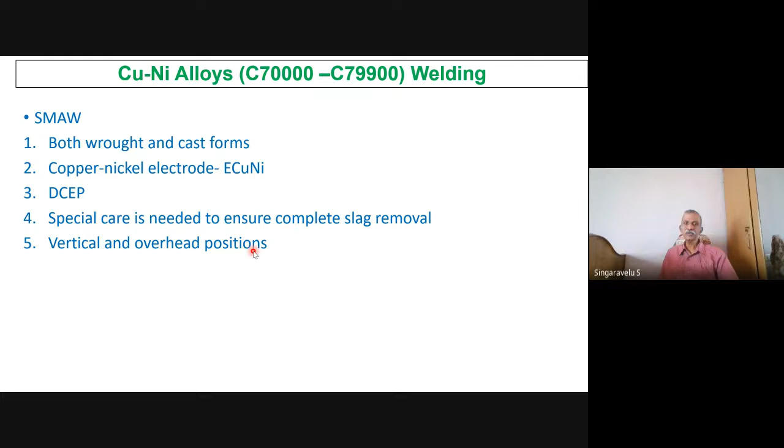Other welding processes besides TIG, MIG, plasma and manual welding include electron beam welding and laser beam welding. Difficulties include high reflection of the laser beam and higher thermal conductivity. Absorption increases with temperature, so a shorter wavelength is required.

Electron beam welding can be done for both thin and thick sections. Resistance spot welding can also be used; lower conductivity alloys can be easily spot welded, but it's not practical for unalloyed copper.

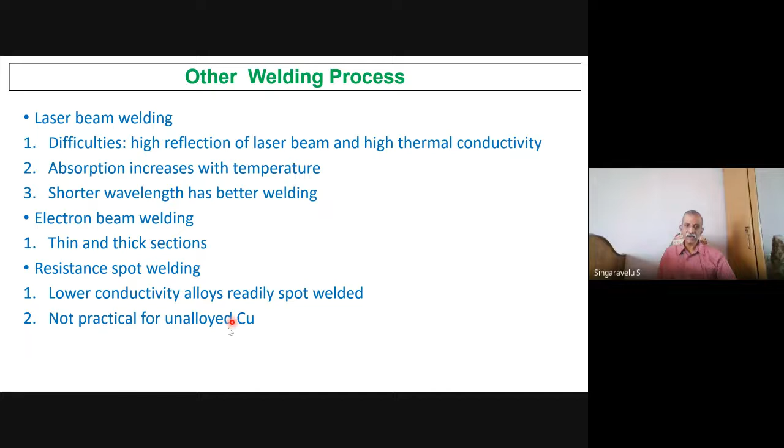Flash welding can also be done. Leaded copper, up to 1% lead, can be flash butt welded with rapid upsetting at minimum pressure. Yesterday we discussed high strength low alloy steel where pressure has to be increased; here you have to go for minimum pressure, due to no defined melting point and a narrow plastic range.

Premature termination of the current results in lack of fusion, while delayed termination causes overheating. Parameter setting is very critical. In solid state welding, annealed copper can be welded at room temperature due to good malleability. Diffusion welding or explosive welding is also possible. These are some of these processes.

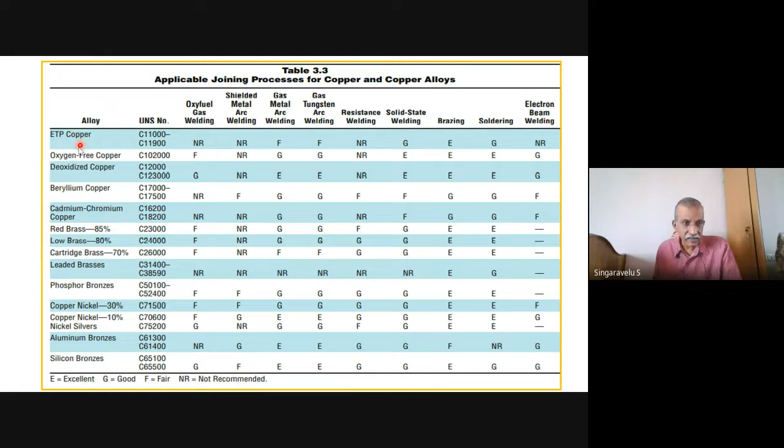This gives a rating for the processes against materials such as ETP copper, oxygen-free copper along with UNS numbers, brass, cadmium copper, lead brass, phosphorus bronze, and so on. Against these, many processes are discussed including shielded metal arc welding.

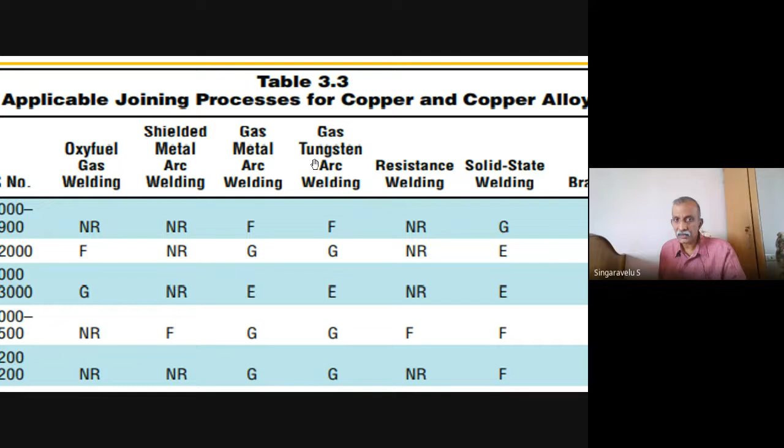This one I have not discussed: gas metal arc welding, gas tungsten arc welding, resistance welding, solid state welding, brazing, soldering, electron beam welding, and so on. For each material, a table is given which provides useful information on whether a process is fair, good, recommended, or not.

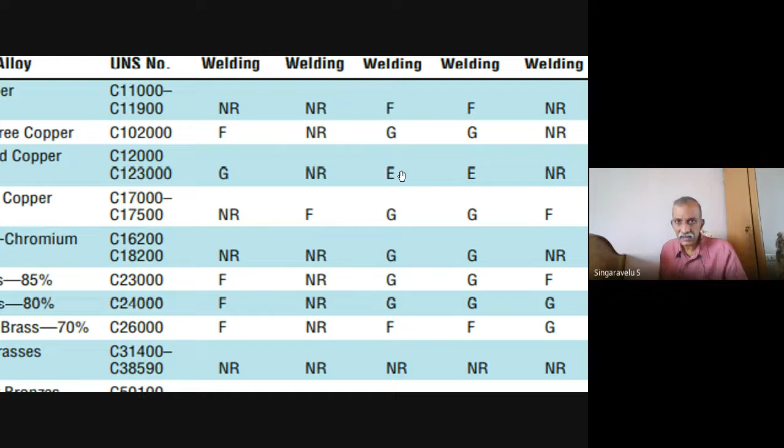When marked F, it is fair. When marked NR, it is not recommended, meaning you should not do this process at all. When marked G, it is good, and when marked E, it is excellent. You have to select the process with respect to these materials depending on this table. NR means not recommended, G means good, F means fair, E means excellent.

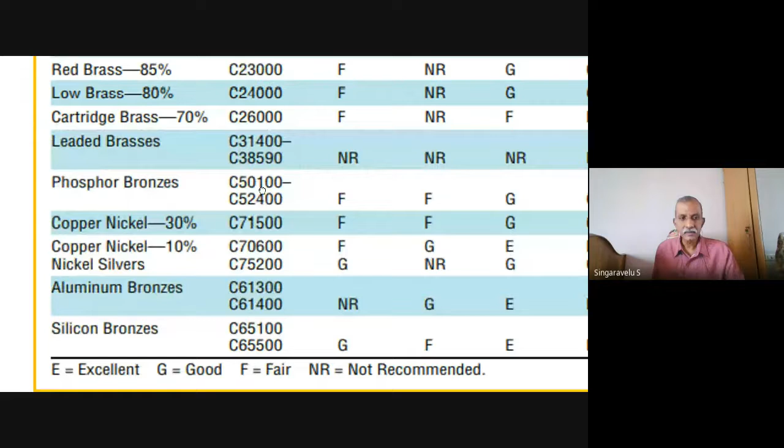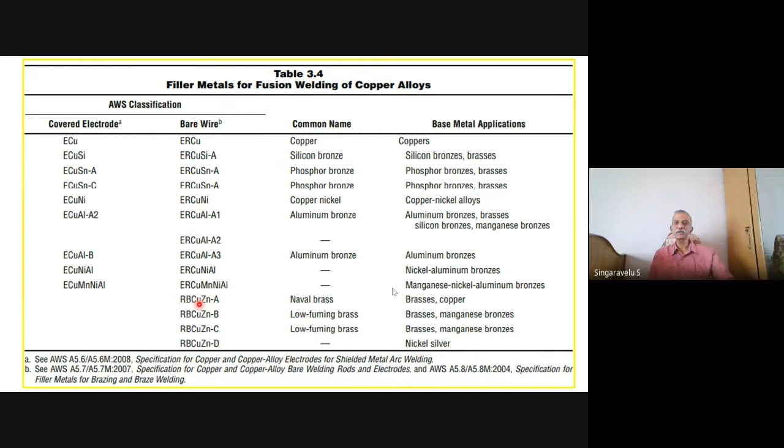And with this, I wanted to finish this lecture. If there are any doubts, please ask; otherwise we can hand over the session to the next faculty.